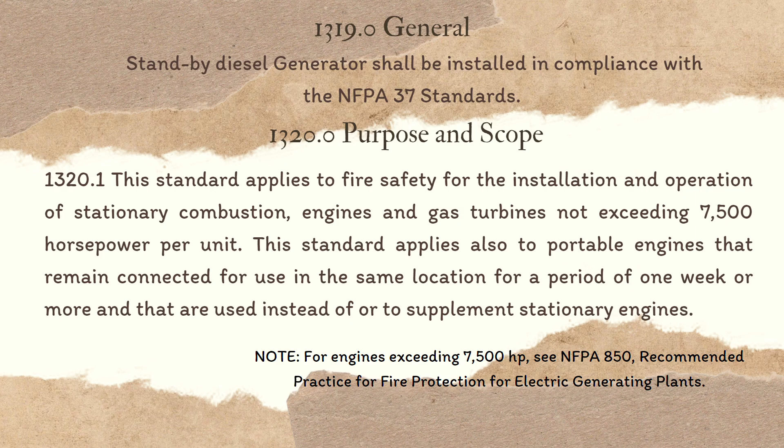This standard does not apply to engines used to propel any mobile structure. So its special application: engines used to drive fire pumps shall comply with this standard, and those contained in NFPA 20, standard for the installation of centrifugal fire pumps. In cases where provisions of NFPA 20 differ with those in this document, the provisions in NFPA 20 shall take precedence.

Engines used in essential electrical systems in healthcare facilities shall comply with this standard, and any special provisions contained in NFPA 99, standard for healthcare facilities.

1322.0 Discretionary powers of authority having jurisdiction. Nothing in this document is intended to prevent the use of systems, methods, or devices of equivalent or superior quality, strength, fire resistance, effectiveness, durability, and safety to those prescribed by this document, provided technical documentation is submitted to the authority having jurisdiction to demonstrate equivalency and the system, method, or device is approved for intended purpose.

So here are the official NFPA definitions. First, shall indicates a mandatory requirement. Approved means acceptable to the authority having jurisdiction. Labeled means equipment or materials to which has been attached a label, symbol, or other identifying mark of an organization that is acceptable to the authority having jurisdiction and concerned with product evaluation that maintains periodic inspection of production of labeled equipment. Should indicates a recommendation or that which is advised but not required.

Authority having jurisdiction means the organization, office, or individual responsible for approving equipment, an installation, or a procedure. Listed means equipment or materials included in a list published by an organization acceptable to the authority having jurisdiction and concerned with product evaluation that maintains periodic inspection of production of listed equipment.

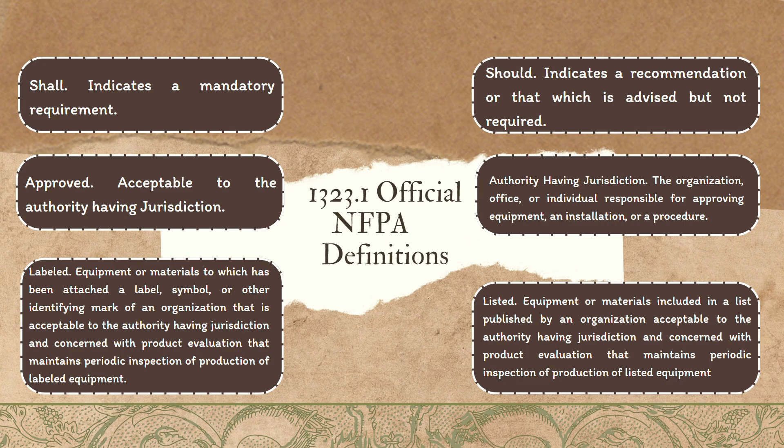So here are the definition of terms used in this standard. Engines means prime movers such as internal combustion engines, external combustion engines, gas engines using either gaseous fuels or liquid fuels or combinations. Engines, portable: engines mounted on skids, wheels, or otherwise arranged so that they can be moved from place to place as the required service indicates.

Flue gas temperatures means the temperatures of the flue products at the point or points of passing close to or through combustible materials or at the entrance to a chimney, whichever is applicable. Gallon: 1 US gallon is equal to 3.785 liters. Hazardous locations means, for purposes of this document, areas where flammable or combustible gases or liquids or combustible dust or flyings normally exist.

Horsepower rating. Reciprocating engines: the power of an engine measured at the flywheel or output shaft at standard SAE conditions of 752.1 mmHg barometer at 25 degrees Celsius inlet air temperature in accordance with SAE J1349, Engine Power Test Code, Spark Ignition and Diesel.

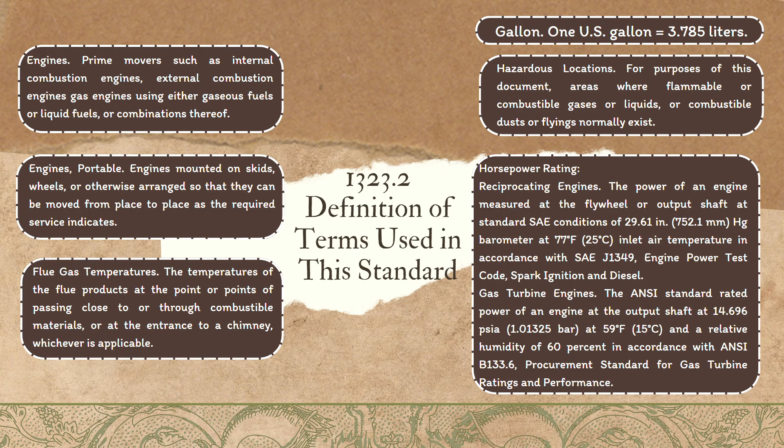Gas turbine engines: the ANSI standard rated power of an engine at the output shaft at 14.696 pounds per square inch absolute at 59 degrees Fahrenheit and a relative humidity of 60% in accordance with ANSI B133.6, procurement standard for gas turbine ratings and performance.

Spark protected: electrical equipment enclosed in a tight case or protected by shields, screens, or insulation that will contain sparks or prevent their emission. Tank, day: a fuel oil tank located inside a structure that provides fuel to the engine. Tank, enclosed: a fuel tank located within a separate room, separated from other equipment.

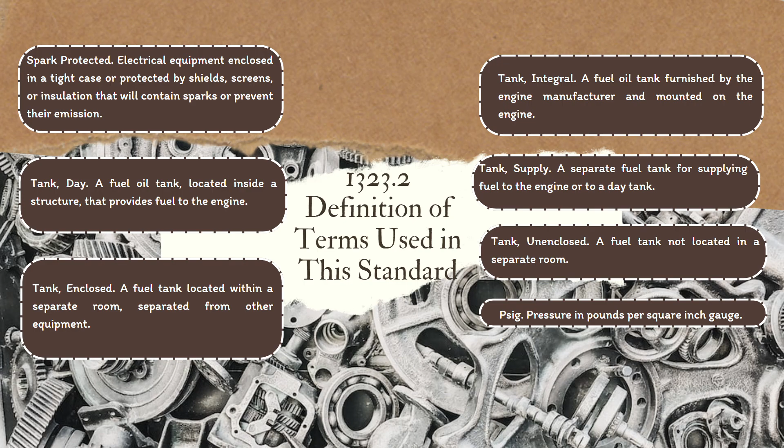Tank, integral: a fuel oil tank furnished by the engine manufacturer and mounted on the engine. Tank, supply: a separate fuel tank supplying fuel to the engine or to a day tank. Tank, unenclosed: a fuel tank not located in a separate room. PSIG: pressure in pounds per square inch gauge.

1324.0 about engines. Engines with or without their weatherproof housings that are attached to the engine subbase shall be permitted to be installed outdoors, inside structures, or on roofs of structures.

Engines and weatherproof housing, if provided, that are installed outdoors or on roofs of structures shall be located at least 5 feet from openings in walls and at least 3 feet from structures having combustible adjacent walls.

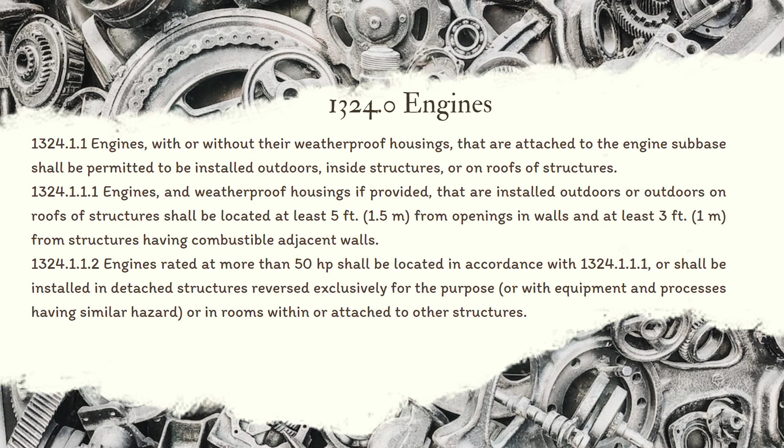Engines rated at more than 50 horsepower shall be located in accordance with 1324.1.1.1, or shall be installed in detached structures reserved exclusively for the purpose, or in rooms within or attached to other structures.

Detached structures shall be of non-combustible or fire-resistive construction. Provision shall be made for venting a fuel explosion with minimum structural damage, or ventilation adequate to prevent a hazardous accumulation of flammable vapors or gases shall be provided both when the engine is operating or shut down.

Rooms located within structures shall have interior walls, floors, and ceilings of at least 1 hour fire resistance rating. Openings in the engine room that open into other sections of the structure shall be provided with automatic or self-closing fire doors or dampers to confine a fire to the engine room.

Rooms in attached structures shall comply with 1324.1.1.2.1, except that the common wall shall have a fire resistance rating of at least 1 hour. Openings in the engine room that open into the interior of a structure shall be provided with automatic or self-closing fire doors or dampers.

All engines shall have adequate emergency lighting as well as normal lighting. Engines shall be situated so that they are readily accessible for maintenance, repair, and firefighting. Provision shall be made to supply sufficient air for combustion, proper cooling, and adequate ventilation.

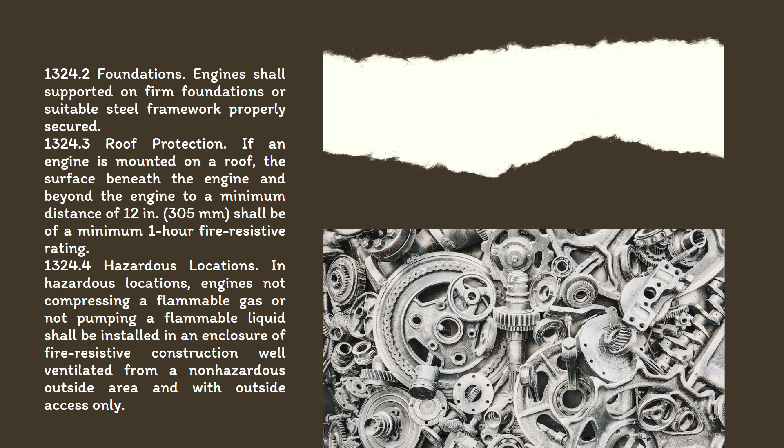engines not compressing a flammable gas or not pumping a flammable liquid shall be installed in an enclosure of fire-resistive construction, well ventilated from a non-hazardous outside area and with outside access only.

Units handling hazardous materials: the use of an integral engine-driven unit compressing a flammable gas or pumping a flammable liquid is permitted, provided the combination unit or groups of such combined units are suitably isolated from areas not having a similar hazard. Isolation shall be permitted to be achieved by location outdoors or by indoor structural separation in accordance with

1324.1.1.2, except that indoor installation shall also comply with 1324.5.1.1 through 1324.5.1.3.

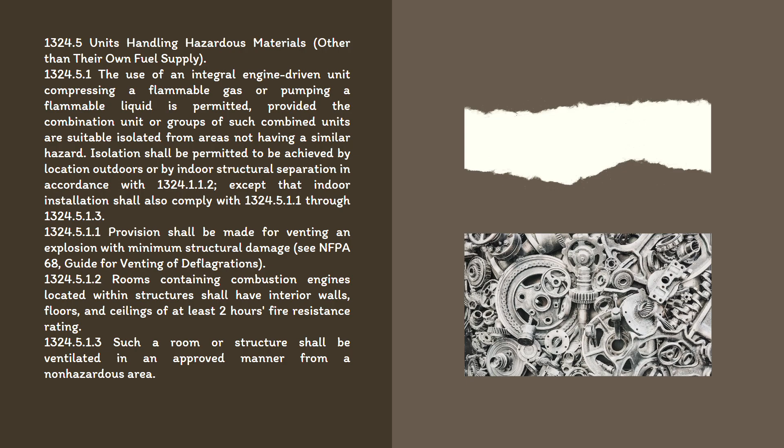Provision shall be made for venting an explosion with minimum structural damage. Rooms containing combustion engines located within structures shall have interior walls, floors, and ceilings of at least 2 hours fire resistance rating. Such a room or structure shall be ventilated in an approved manner from a non-hazardous area.

H. Spark ignition engines comprising part of a unit for compressing a flammable gas or pumping a flammable liquid shall have magnetos or distributors and coils of the spark-protected type and have all leads positively attached.

Ventilation openings in such devices shall be adequately protected by a fire screen, unless the device is purged, pressurized, or otherwise protected.

Ignition wire shall be positively attached at each end by use of the outer sheath of the insulation. Spark plugs shall be fully shielded against flashover. Fully radio-shielded spark plugs or spark plugs provided with insulating boots are acceptable.

Flame arresting equipment shall be attached securely to the engine air intake to avoid blow-off or rupture. A firmly fixed air filter shall be considered as meeting this requirement.

Starter, generator, and associated electrical equipment attached to engines shall be of the spark-protected type. Batteries, wiring, and electrical protective devices shall be protected against flashover and accidental shorting. Means shall be provided for shutting down the engine at a readily accessible location remote from the engine.

Next is the electrical installations. Electrical installations in rooms containing engines shall comply with NFPA 70. Engine rooms or other locations shall not be classified as hazardous locations as defined in Article 500 of NFPA 70.

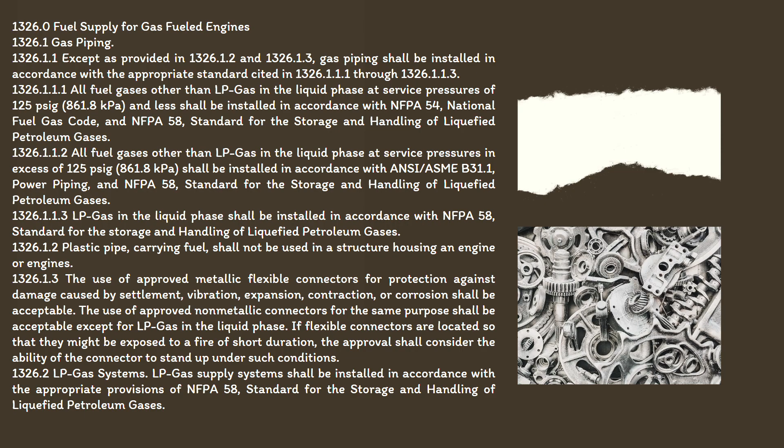LP gas supply systems shall be installed in accordance with the appropriate provisions of NFPA 58. Next is regulators. A gas pressure regulator located inside a structure shall be provided with either a vent to the outside of the structure, discharging at least 5 feet away from any structure opening, or a listed vent limiting device.

Exception: any regulator or zero governor that operates with gas pressure on both sides of the diaphragm shall not require venting. When the gas pressure on the upstream side of the regulator is more than 1/2 pound per square inch gauge, a relief valve should be installed on the downstream side of the regulator.

The relief valve should be connected to the outside of the structure and shall discharge at least 5 feet away from any structure opening, and such relief valves and any connected piping shall be sized to vent the required volume of gas.

Gas piping to engines shall have an approved shut-off valve remote from the engine and preferably outside the structure. If the valve is locked open, the key shall be secured in a well-marked, accessible location near the valve.

Every gas engine shall have a carburetion valve, zero governor type regulating valve, fuel control valve, or an auxiliary valve that will automatically shut off the flow of gas in case the engine stops from any cause.

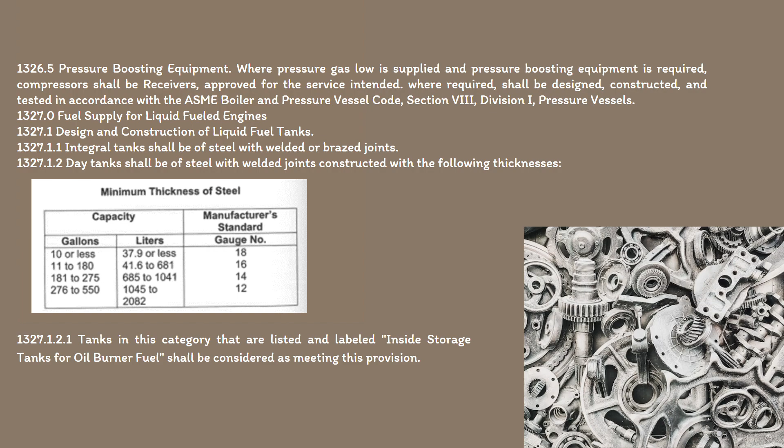So, tanks in this category that are listed and labeled inside storage tanks for oil burner fuel shall be considered as meeting these provisions.

Outside above ground or underground fuel supply tanks shall be constructed in accordance with the applicable tank specification NFPA 30, Flammable and Combustible Liquids Code.

Underground tanks smaller than 2,500 gallons capacity that are listed and labeled as underground tanks for flammable liquids. Above ground tanks that are listed and labeled above ground tanks for flammable liquids, and tanks constructed in accordance with API 650 welded steel tanks for oil storage, shall be considered as meeting this provision.

Underground tanks and piping containing flammable liquids shall comply with all federal, state, and local regulations.

Fuel tanks for gasoline. Only integral tanks shall be permitted inside or on roofs of structures. An integral tank shall not exceed 25 gallons capacity and not more than one tank shall be installed on each engine. The tank shall be securely mounted on the engine assembly, protected against vibration, physical damage, engine heat, and the heat of exhaust piping. Tanks other than integral tanks shall be located underground or above ground outside of structures.

Other requirements for day and supply tanks such as construction, minimum distance from any line of adjoining property that might be built upon, spacing, dikes, foundations, supports, depths and cover, anchorage, and normal emergency vents and testing shall be in accordance with the applicable provision on NFPA 30.

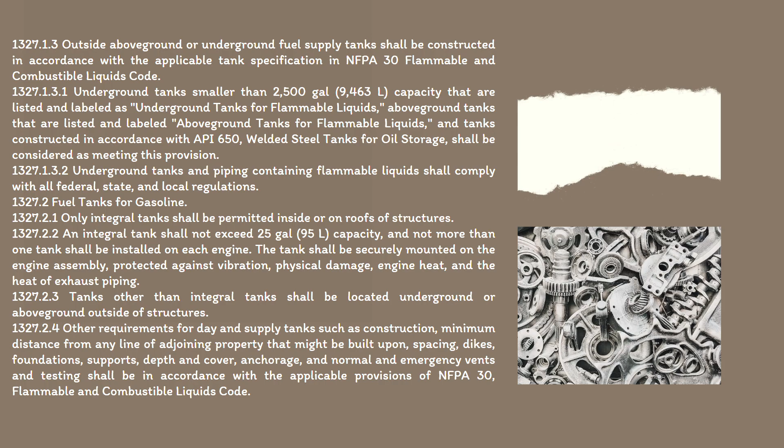Fuel tanks for diesel and fuel oils. Not more than one integral tank shall be installed on each engine. It shall be securely mounted on the engine assembly, protected against vibration, physical damage, engine heat, and the heat of exhaust piping. Fuel tanks inside structures.

Day or supply tanks inside structures shall be securely mounted on substantial non-combustible supports. Tanks not used for emergency purposes. An unenclosed day tank located above the lowest story, cellar, or basement shall not exceed 60 gallons capacity, and the total capacity of these tanks so located shall not exceed 60 gallons.

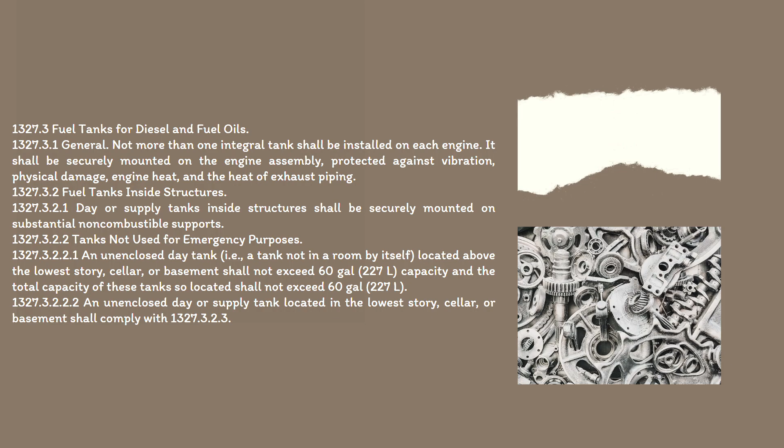An unenclosed day or supply tank located in the lowest story, cellar, or basement shall comply with 1327.3.2.3.

Tanks used for emergency purposes.

Unenclosed day tanks or supply tanks supplying engines that drive generators, alternators, fire pumps, or other equipment used for emergency purposes shall not exceed 660 gallons. Not more than one unenclosed 660 gallon capacity tank, or two or more unenclosed tanks with an aggregate capacity of not more than 660 gallons, shall be connected to one engine.

The aggregate capacity of all unenclosed day and supply tanks in a building shall not exceed 1,320 gallons.

Day and supply tanks with individual capacities larger than 660 gallons, or those tanks that cause the unenclosed aggregate capacity to exceed 1,320 gallons in a building, shall be enclosed in accordance with 1327.3.5.

Unenclosed tanks larger than 60 gallons aggregate capacity used for emergency purposes described in 1327.3.2.3.1 shall not be used for any other purpose.

Unenclosed day or supply tanks located above the lowest story, cellar, or basement shall have either a wall, curb, or dike having a capacity at least equal to that of the largest surrounded tank, or a wall, curb, or dike of lesser capacity equipped with an overflow or drainage system that shall be adequate in size and location to convey any spillage of fuel to a tank or to a safe area outside the structure.

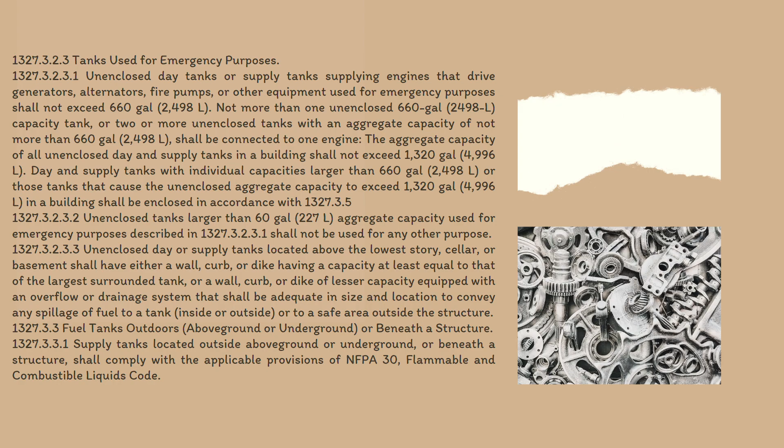Fuel tanks on roofs. Day or supply tanks on roofs shall be securely mounted on substantial non-combustible supports. Unenclosed day supply tanks located on roofs shall have either a wall, curb, or dike having a capacity at least equal to that of the largest tank, or a wall, curb, or dike of lesser capacity equipped with an overflow or drainage system that shall be adequate in size and location to convey any spillage of fuel to a tank or to safe areas outside the structure.

Day or supply tanks not used for emergency purposes shall meet the size limitations of 1327.3.2.3.1.

Rooms housing only fuel tanks. Rooms containing only tanks shall be constructed of walls, floor, and top having a fire resistance rating of not less than 3 hours with the walls bonded to the floor. If the walls of such rooms extend to and are bonded to the underside of a concrete floor or roof above which has a fire resistance rating of not less than 3 hours, a separate top is not required for the room. At least 15 inches clearance shall be left around the tank for the purpose of inspection and repair.

Each tank room shall be provided with an opening that is closed by a self-closing Class A fire door if it opens inside a building. If a door opening goes outside, an appropriate door shall be provided based on exposure presented. Opening shall be protected by a ramp or sill high enough to contain the entire contents of the tank within the walls to the height corresponding to the level of oil that will be retained, and the sill shall be built to withstand the lateral pressure due to liquid head, and walls and floor shall be waterproof. In lieu of this, a drain to a properly sized underground tank is permissible.

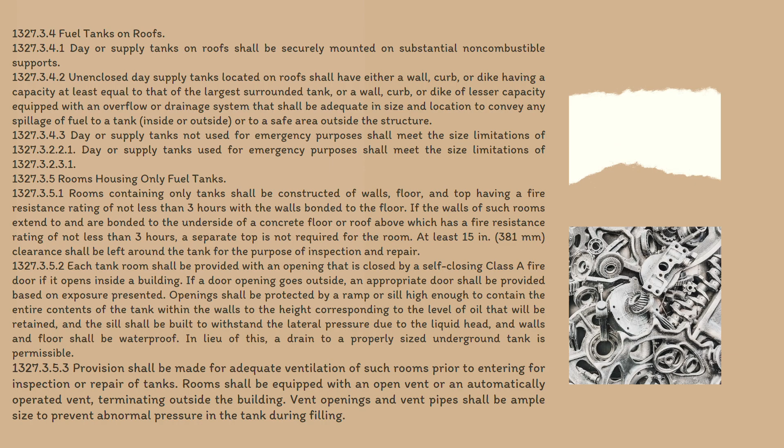Next is fuel flow control. Liquid fuel supply systems, including drains from carburetors, shall be designed and installed to minimize as far as practicable the accidental discharge of fuel into the engine room or structure. Where supplied by pumps, day tanks or integral tanks shall be provided with an overflow line, a high-level alarm, and high-level automatic shutoff.

Overflows, vents, fuel piping, or fuel tanks shall not be located at or near engine air intake, exhaust piping, mufflers, or filters. Where crude or residual oils are utilized as engine fuel, it is sometimes necessary to heat the fuel above the flash point for satisfactory handling and injection into the engine.

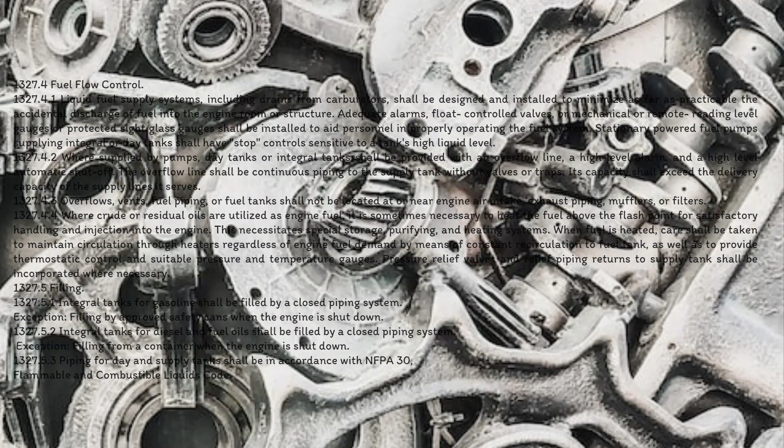Next is filling. Integral tanks for gasoline shall be filled by a closed piping system. Exception: filling by approved safety cans when the engine is shut down. Integral tanks for diesel and fuel oils shall be filled by a closed piping system. Piping for day and supply tanks shall be in accordance with NFPA 30. Next is vent piping. Vent piping shall be installed in accordance with NFPA 30.

Fuel piping, valves, and fittings. Piping shall be in accordance with Chapter 3 of NFPA 30, except that piping shall be steel or other metal, and the provisions of 6 to 7.2 shall apply. Piping system shall be substantially supported and protected against physical damage and excessive stresses. Sufficient valves shall be provided to control flow of liquid fuel in normal operations and to shut off the flow of fuel in the event of pipe break. Piping to above-ground supply tanks filled from tank cars or tank vehicles by centrifugal pumps shall be provided with check valves to prevent backflow.

Transfer of liquid fuel to engines. Liquid fuel shall feed to engines by pumps only, except that gravity feed is permitted from integral tanks. Where engines are installed above the lowest story, cellar or basement, or on roofs, the fuel supply shall be pumped to day or supply tanks in an approved manner.

Next is exhaust piping and chimneys. Engine exhaust discharge system shall be designed on the basis of flue gas temperatures. Exhaust pipe shall be of wrought iron or steel and of sufficient strength to withstand the service.

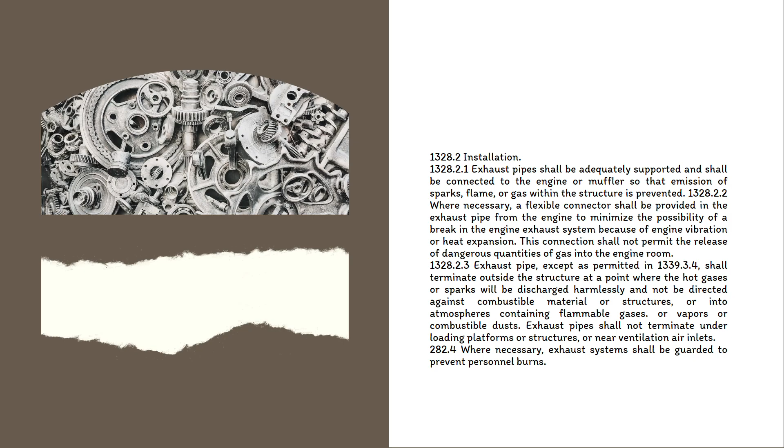Clearances from combustible material for low heat appliances. Exhaust pipes shall be installed with clearances of at least 9 inches to combustible material except as provided in 1328.3.2 and 1328.3.3. Exhaust pipes passing directly through combustible roofs shall be guarded at the point of passage by ventilated metal thimbles that extend not less than 9 inches above and not less than 9 inches below roof construction and are at least 6 inches larger in diameter than the exhaust pipe.

Exhaust pipes passing directly through combustible walls or partitions shall be guarded at the point of passage by one of the following methods: metal ventilated thimbles not less than 12 inches larger in diameter than the exhaust pipe, or metal or burned fire clay thimbles built in brickwork or other approved fireproofing materials providing not less than 8 inches of insulation between the thimble and combustible material.

So, exhaust pipes shall be connected to or pass inside of a metal, masonry, or factory-built chimney where the exhaust gases go through a floor, ceiling, attic, or concealed space. Where an exhaust pipe is connected to a chimney, a muffler, when necessary, shall be installed between the engine and the point where the exhaust pipe enters the chimney. If other fuel-burning appliances are vented into the same chimney, the engine exhaust pipe shall extend up in the chimney beyond any other flue connection.

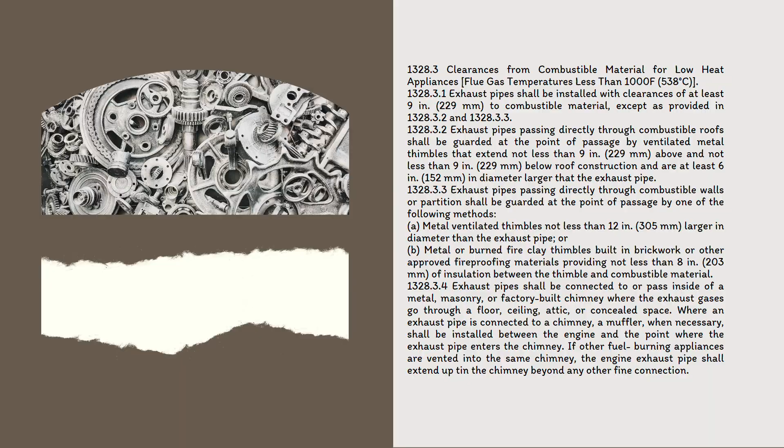So, clearances from combustible materials for medium or high heat appliances. Exhaust systems for medium or high heat appliances shall be given special consideration as to clearances from combustible materials and as to design of exhaust and shall comply with NFPA 211.

So, next is lubricating oil, crankcase, or oil reservoir protection. Crankcase or oil reservoirs shall be vented in accordance with manufacturer recommendations and with federal, state, and local regulations. On engines where crankcase explosion can be a hazard, adequate explosion escape openings shall be provided or suitable means used to maintain a non-flammable atmosphere in the crankcase.

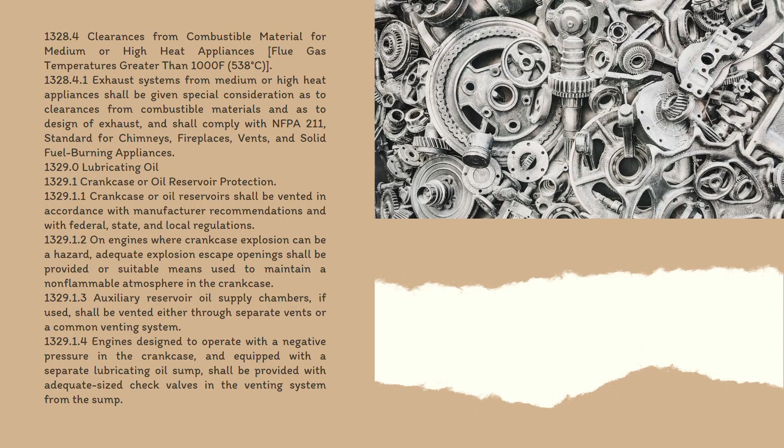Auxiliary reservoir oil supply chambers, if used, shall be vented either through separate vents or a common venting system. Engines designed to operate with a negative pressure in the crankcase and equipped with a separate lubricating oil sump shall be provided with adequately sized check valves in the venting system from the sump.

Next is lubricating oil piping. Lubricating oil piping should be in accordance with the provisions of 1328.1, 1328.2, and 1328.3. Safeguards for gauging devices. Glass gauges or sight feeds for lubricating oil, the breakage of which will permit the escape of oil, should be protected against physical damage.

Operating instructions. Instructions for starting, stopping, operation, and routine maintenance shall be supplied with each engine, and where feasible shall be conspicuously posted near the equipment. Emergency instructions. Where a fuel shut-off valve is used, a diagram with shut-off instructions shall be conspicuously posted on or near the valve, a safe distance from the engine or other potential fire location.

Fire protection. Fire protection shall be provided in accordance with requirements of NFPA 101. Fire extinguishers. For liquid fuel engines, including LP gas in the liquid phase, approved portable fire extinguishers of appropriate size, type, and number shall be provided as specified in NFPA 10.